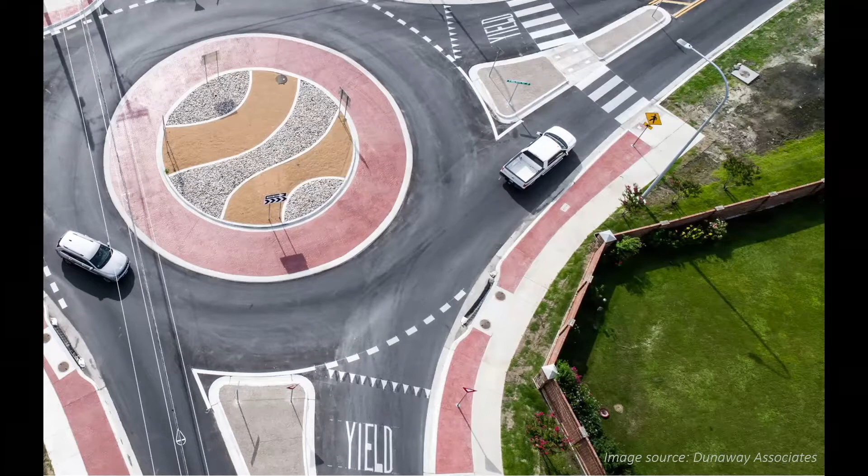I spent a lot of time thinking about this and trying to identify why people would construct arguments against them. And what ended up coming across was this concept that the way in which we create our attitudes or have certain values has a lot to do with proximity, how close we are to things in space and how close we are to things in time.

Both of those dictate what kind of exposure we have to certain experiences and influences. But then overlaid on that is where we live and where we work and where we play. But those things all together really feed into the things that we value and hold in the highest regard, and also our attitudes, the way we feel about those things.

And from those arise four issues. The first is being misinformed or having misinformation. The second is our emotional needs, the things that we need to feel good or to feel happy. But then also from those arise both conflicts of interest and conflicts of values. And I think this is where we're at currently, a conflict of values.

For me, it leaves me sitting there saying to myself, well, if I just close my eyes for a while, maybe all this mess will disappear, right? The classic Eeyore quote from Winnie the Pooh.

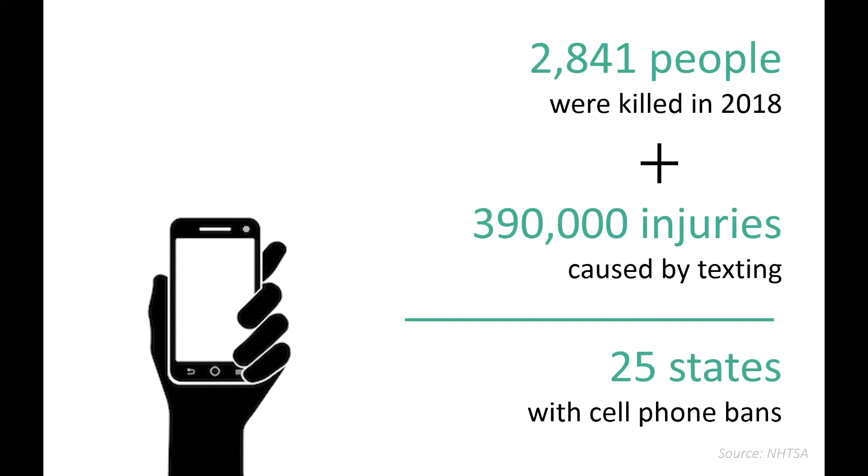And for those of you who have watched the recent Netflix documentary series, The Social Dilemma, they discuss why that's the case, and there's all these algorithms that are just trying to get our attention constantly.

I think beyond that, in some senses, we have forgotten really what it means to be human, and I think we've forgotten how to afford ourselves the time to enjoy movement. I think that we have lost the human element of transporting through in our environments.

We often overlook the fact that we're not only responsible to ourselves when we get behind the wheel of a vehicle or get on a bicycle or get on an e-scooter, but we're also responsible for everyone else around us. And we also have to hold both ourselves and others accountable for being safe and making safe choices.

So I would like to encourage everyone to just look. So look around, look ahead, keep your eyes on the road, and really look out for each other.

And I would encourage you to think about the first time that you got home from school, and sitting there in the driveway was your first bike, right? Your mom and dad had bought you a bike, and recognizing what that meant to you. So for a lot of people, you ask them, hey, what did that first bike mean to you? And they say freedom.

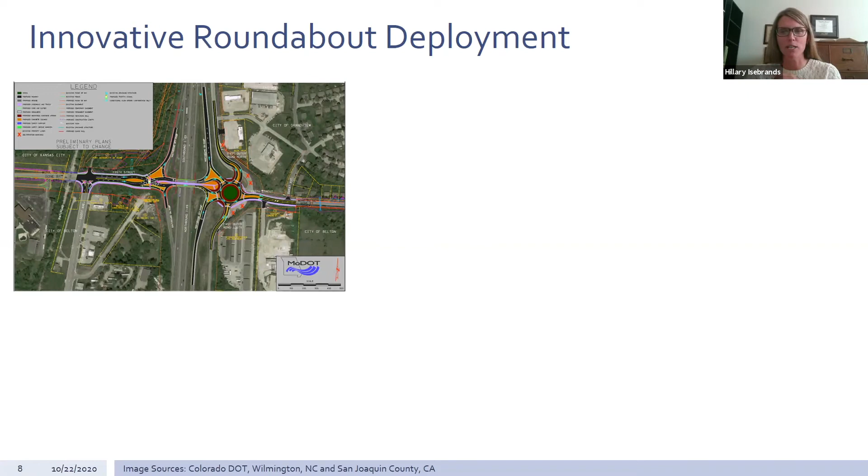Here's an example from Missouri Department of Transportation. You've got a DDI with a roundabout, and by golly, there it is constructed, near Kansas City, Missouri. Missouri DOT has 2 DDIs with roundabouts, really doubling down on safety and efficiency at these interchanges with a roundabout and a diverging diamond interchange. So be watching projects like this. You take a little risk when you do something like this, but we're hoping to reap those safety and operational benefits.

I'm going to share one other piece with innovative roundabout deployment: temporary roundabouts, used during construction. The story here on the right is from Wilmington, North Carolina. Hurricane Florence came rolling through in September of 2018. Law enforcement was trying to tackle traffic control at all the signalized intersections where the lights were out, with no electricity. A police officer said, hey, I want to make a temporary roundabout here so our guys can go work on the flooding and other emergencies in our community because of the hurricane. And lo and behold, it worked. They were able to free up other officers to do other things. In fact, they have now included the temporary roundabout as part of their emergency management plan, and they're able to deploy it pretty quickly.

One other innovative roundabout deployment that's coming is turbo roundabouts. Our friends in the Netherlands, Germany, and Poland have been implementing turbo roundabouts for some time. It's a slight variation of our modern roundabout with some raised channelization to try to prevent property damage only crashes. We will have our first turbo roundabout in the United States in Jacksonville, Florida next year. California and Georgia DOTs are pursuing turbo roundabouts pretty aggressively, so this is something we need to watch as well. We have no guidance in the United States yet - we have a primer that Federal Highways has prepared, but we really don't know how turbos and those features that have worked so well internationally might fit into our modern roundabout deployment here in the United States.

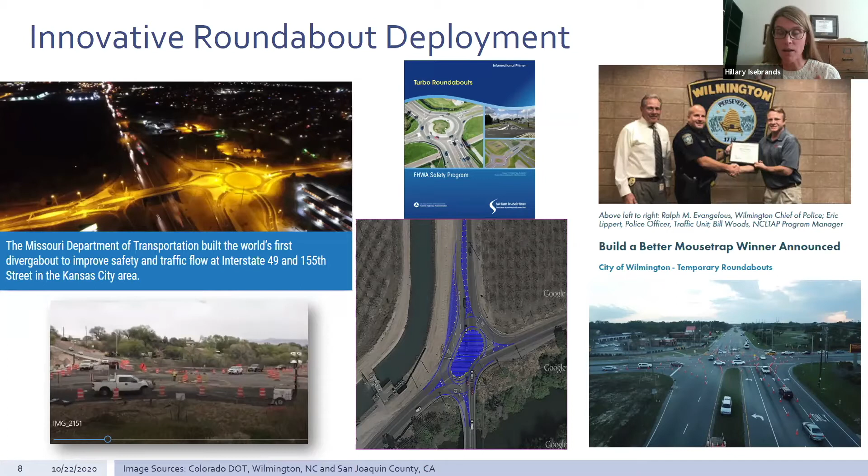All right, I'm going to talk to you about local and rural road safety now. I know many of you are very aware of the safety issues on our rural roadways. We know that about 19% of the nation's population live in rural areas, but 45% of our fatalities are occurring in rural areas. So that is a big challenge for all of us.

There's a lot of conversation going on. I'm not sure if any of you participated in the National Summit on Rural Road Safety the last week of September, or saw the inaugural Rural Road Safety Awareness Week also the last week of September. But from those two efforts - a summit with over 400 people and a social media campaign on rural road safety - some topics really emerged.

One of them was really the theme of the safe system approach. How can we use that safe system approach to improve safety on rural roadways? We have to, as a profession, celebrate the incremental successes - the one day, the one week, the one month without a fatal crash. And you can be more specific: the city of San Diego celebrated, I believe it was 2017 and 2018, having zero bicycle fatalities in their community, and they were celebrating that success.

Partnerships, we can't say enough about partnerships. Basically having a wingman that maybe is not in your same wheelhouse. For me, as an engineer, maybe it's someone in law enforcement or someone in public health.

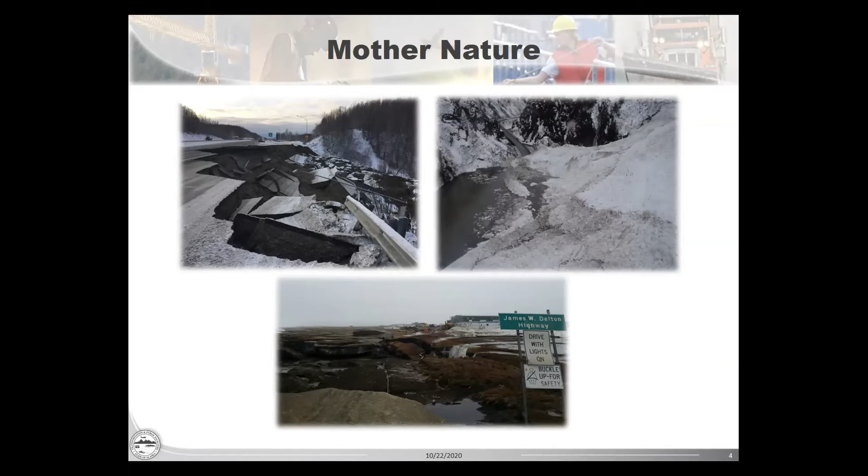In a normal year, Alaskan roads require frequent and substantial maintenance. When Mother Nature wants to take a swipe at us, things get extra dicey. Just for fun, that's the 2018 earthquake on the top left that happened in November 2018 down in the Anchorage area - that one made national news. That top right photo was referred to as the Damalanche in 2014, where a pair of avalanches slid into the Lowe River and dammed it up, then flooded out the highway, cutting off Valdez. This photo at the bottom, believe it or not, there's a highway there - that was the Sag River flood, the road to the North Slope, that just got completely wiped out, cutting off all trucking to the North Slope, which was a huge deal for commerce.

As Nathan mentioned, there was freezing rain, and that's why I'm doing this from home and didn't go into the office.

In Alaska, it's dark in the winter all the time. It's light all the time in the summer. It's dark, it can get dangerously cold. Medical facilities are few and far between, and there's little to no law enforcement. I hate to say that, but we just don't have a big highway safety law enforcement presence. So keeping vehicles on the road is critical. Low volume, a lot of us are relying on passersby to pull us out of the ditch if something happens.

So I want to highlight a few of the things that we're doing, some of which Hillary mentioned, and then some of the challenges we face getting into that.

Before I get into specific countermeasures we've deployed, I want to acknowledge the progress being made in automation. But like many northern tier states, we know that automated vehicles are going to be heavily reliant on lines and markings, and like most northern tier states, we have no idea how that's going to work for us.

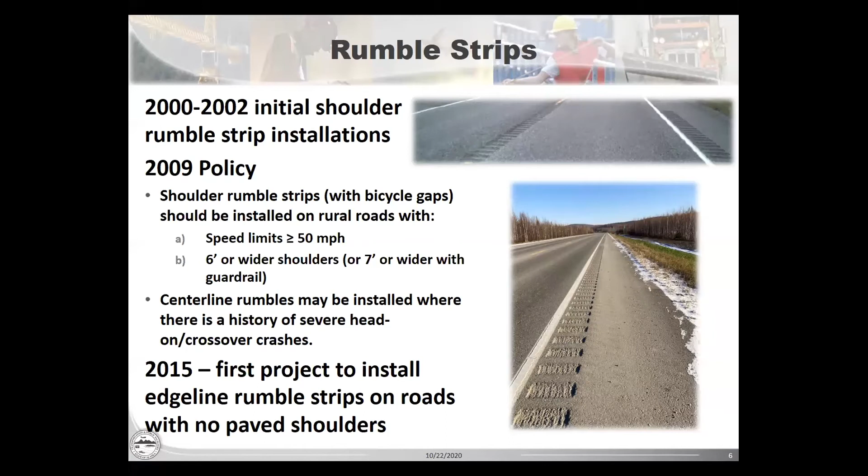Enhanced horizontal alignment. I remember when I first moved up to Alaska going to a peer exchange on safety in Oklahoma City, and I can't remember which state it was, but it was like, this is the year of the curves. We kind of took that to heart.

We worked with the mine on a safety campaign they had a few years ago, and with our radar gun, we clocked multiple people driving over 90 miles an hour leading into this area.

So it's not a surprise that this particular curve was overrepresented with crashes. This is one of the three spots where we did an initial HSIP project to try oversized fluorescent yellow signs, and we got so much positive feedback. People just loved them, and we don't get a lot of positive feedback on what we do, so that was very reassuring.

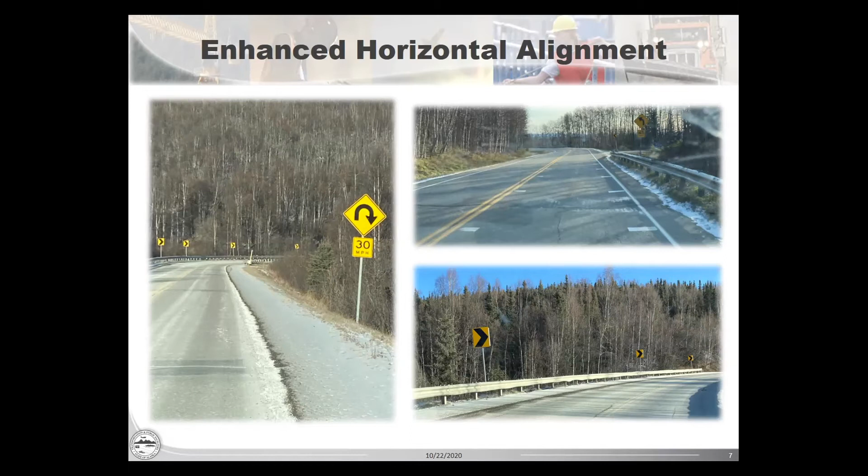Guardrail delineation - how do we delineate this snow-covered roadway on a snow-covered landscape? As you all know, guardrails really only present where we're protecting from a bigger hazard. We use the butterfly tabs in the web, and we've also started using these tabs on the top. There was some initial resistance from our maintenance folks about potentially shearing those off during snow removal operations.

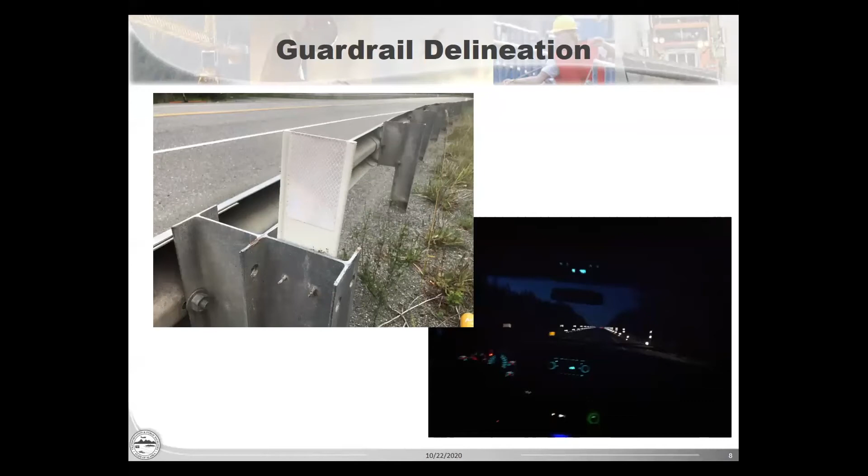It seems to be going okay. The photo on the bottom right is from our Central Region Traffic and Safety Engineer, taken going down one of the safety corridors where they did some enhanced delineation, and it just really pops now. It hasn't snowed yet in that photo, but it's coming.

We've also looked at some targeted installations of corrugated retroreflective strips in the web of the guardrail in some curves with higher crash incidents. We tried it on box beam, and the adhesive stuck in the summer, but between our extreme cold temperatures and our snow removal operations, it came right off. So we're not using it for box beam going forward.

Although in Alaska we don't use concrete barrier on our rural roads, we just started installing some of these new MASH-compliant barriers. One of our engineers in the traffic section came up with the idea to inset those retroreflective corrugated markers so that as the plows scrape the snow off, they're not also scraping those markers off. If anybody is interested, we can get more information on how we set all that up.

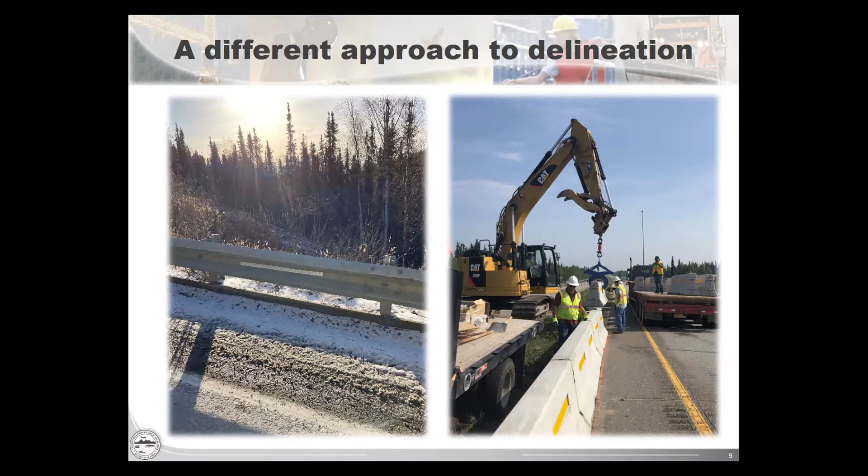So then what do we do in snow areas? These are both out of our Alaska traffic manual - easy to Google if anybody wants the information. We have the shoulder snow pole, which is fairly similar to what you'd see on a freeway for a delineator, and then we have the overhead snow pole, because snowplow operations are not kind to shoulder delineators.

The overhead snow poles work really great, except where we have frost-jacking issues, which cause them to possibly lean and present a less uniform appearance to the driver.

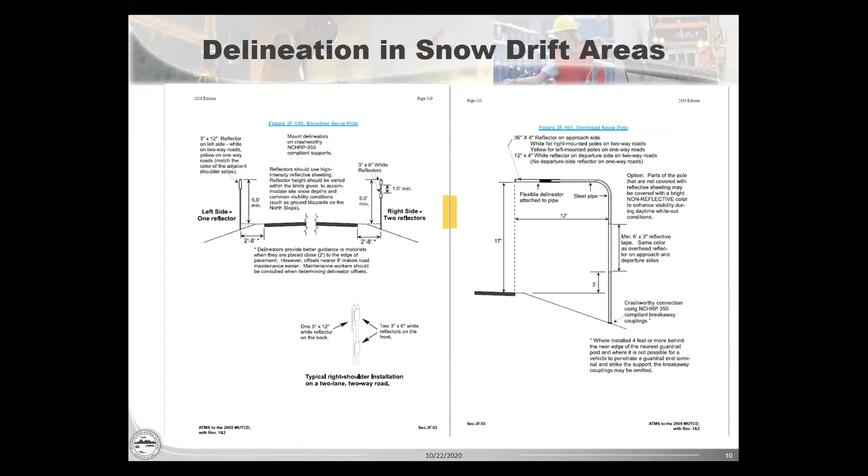All of this is leading me up to the Dalton Highway. The Dalton Highway is the highway to the North Slope. If you've watched Ice Road Truckers or some of those shows about the most dangerous roads in the country or the world, the Dalton Highway is often featured.

White delineators are required by the MUTCD for both sides of the 2-lane road. The Dalton Highway is about 415 miles long, and that doesn't even count the highways you have to take to get to the Dalton Highway.

Now remember, north of the Arctic Circle, there's no daylight for a good chunk of the winter at all. Here in Fairbanks, we're well south. We have about 3 hours and 45 minutes at winter solstice. So dark, dark, dark.

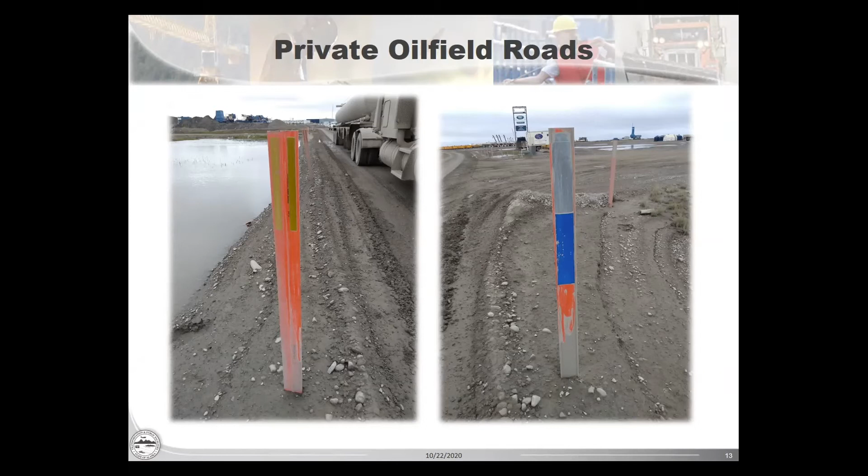And that's it. So if you need to get a hold of me because you're interested in learning about how you could help us figure out how to do a better delineation of the road, that's how to get a hold of me. And that is the Arctic Ocean in the background.

There we go, sorry about those technical difficulties. You are just fine, Pam. Thank you so much, great information. Well, we appreciate the three presenters for their time.

Now what we're going to do is go ahead and move to the questions you've been asking. We've got two that are unanswered, and a few that have been answered, but we'll go ahead and start. This first one is for Pam: for residential areas with a high flow of traffic, what is the best way to protect pedestrians during icy conditions?

So, boy, that's a tough one. Lighting and speed. When I think of a residential area, I'm thinking city-type streets and keeping folks safe. Safety is a shared responsibility. I heard that at the peer exchange earlier this year, and I believe it to the core of my soul that we all have to be aware of everybody else out there. So as drivers, we have to be more aware, and as pedestrians, we have to be more aware. In general, our city streets are pretty well lit. We don't have heavy residential development or driveway density type stuff so much outside of that, but that's a tough one, and I'd gladly let either of the other panelists pop in on that.